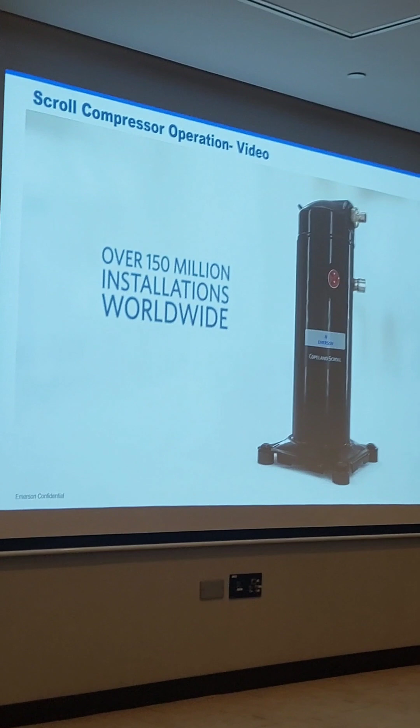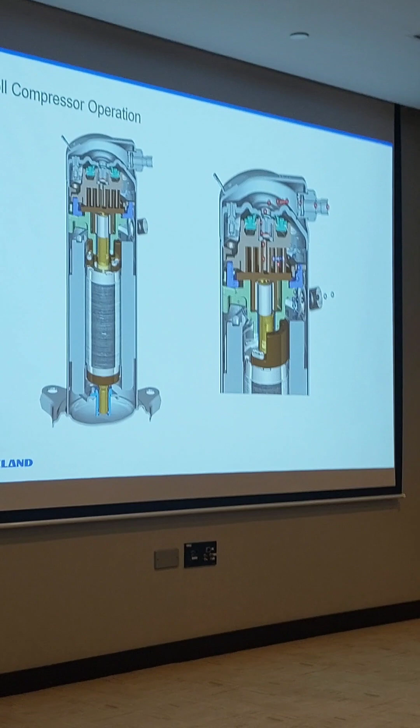So you could see in this particular graphic the refrigerant. Okay, I'll just show this one. The refrigerant enters here, gets into this pocket first, moves from one pocket to another pocket until it reaches high pressure. From here, the discharge takes place. So in the scroll compressor, the top shell is the discharge shell, so it will always be hot, unlike a reciprocating compressor. Because it works on a high precision operation.

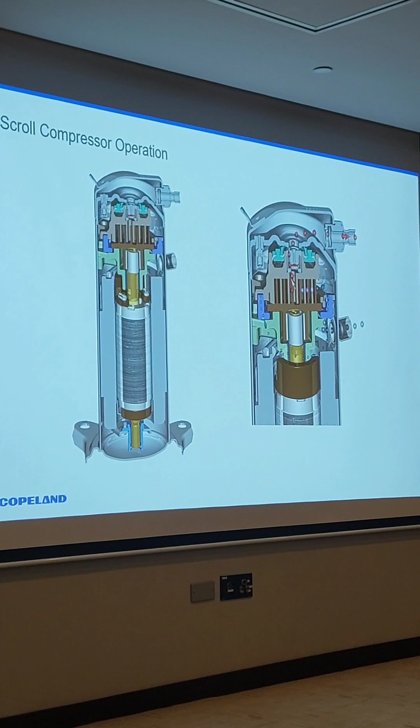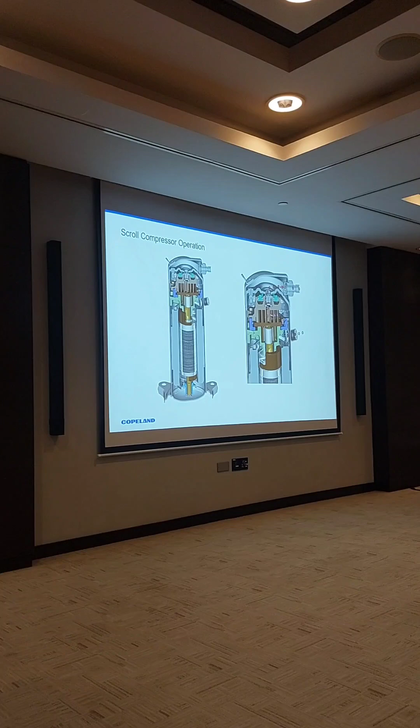Is there any pressure relief valve or something? Yeah, actually, we have a pressure relief valve up to 5 HP capacity. The pressure relief valve is used only when you don't use an HP cutout. In smaller systems like 2 HP, 2-ton systems, people may not use an HP cutout, so we use a pressure relief valve inside the scroll. So up to 5 HP you get the pressure relief valve.

Beyond that, it is compulsory for you to use an HP cutout. Generally, everyone uses the HP cutout when it comes to bigger capacity. With smaller capacity, people take a chance, where we have the IPRV, internal pressure relief valve. Okay, that's how it takes place. The top shell will always be at discharge temperature.

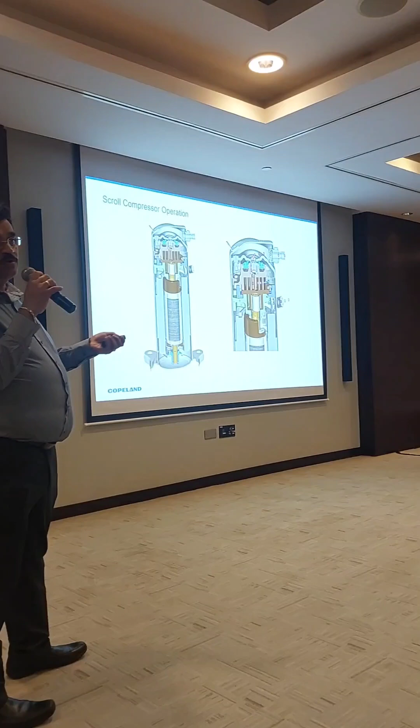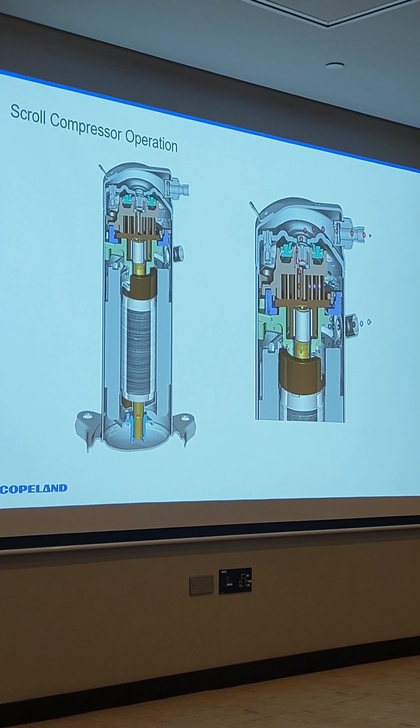While handling the scroll compressor, you have to be careful because the top shell can go up to even 100 degrees centigrade or so. So be careful while handling the compressor, especially when it is running, touching these parts. And don't run any wire on the top. If the temperature increases, depending on the quality of wire, the wire can melt. So you have to ensure that there is no sensor or wire passing on the top of this while installing.

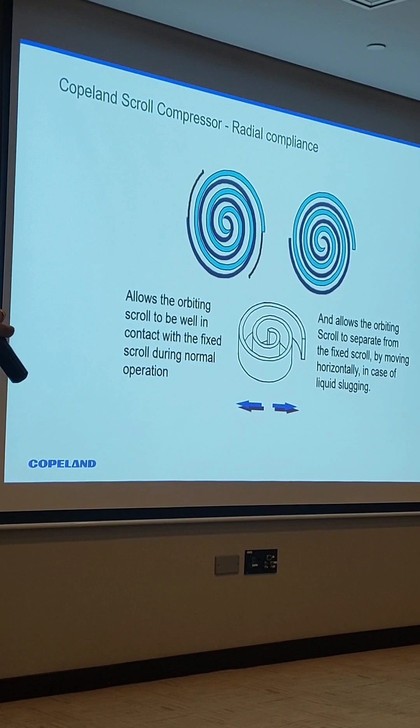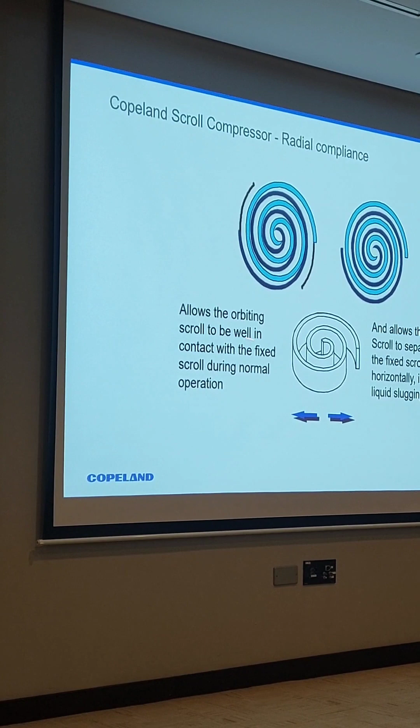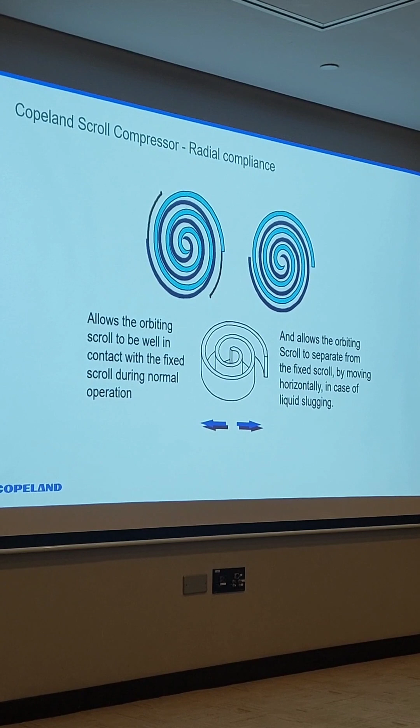So we call our compressor a compressor with dual compliance. It has radial compliance as well as axial compliance. Radial compliance is when the scroll flanks get separated from each other when liquid enters inside. Generally in a reciprocating compressor, when liquid enters the cylinder, you cannot compress liquid. We can compress only vapor.

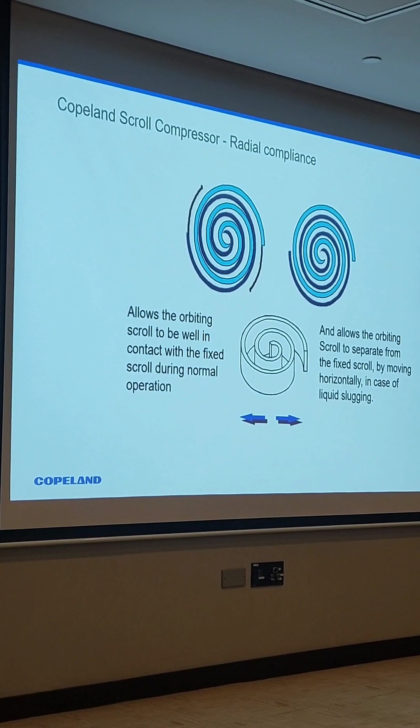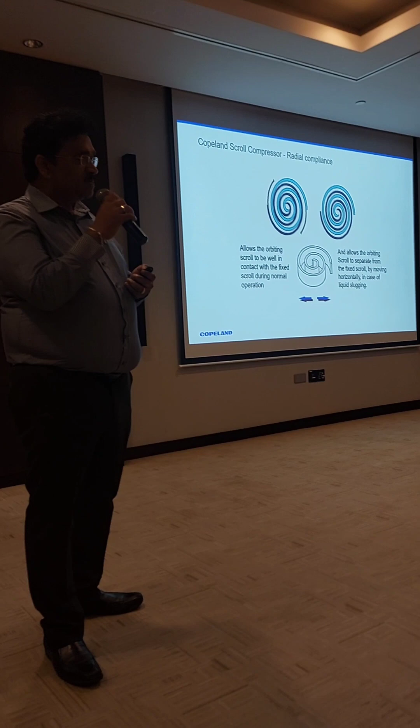If you try to compress a liquid, it will break your reeds, it may break your valve plate, it may break your gaskets. We call it blown gaskets. It breaks because it tries to find the least path of resistance to go out. Even small liquid handling will be very difficult for a reciprocating compressor, but the scroll can handle liquid much better.

Because of radial compliance. As in the earlier video, there is contact made between the fixed scroll flank and the orbiting scroll flank, sideways as well. That contact is made because of centrifugal force when running at 2900 RPM. When the contact is made, there is no bypassing of gas from one pocket to another. The gas moves from low pressure to high pressure towards the center, with no bypass of refrigerant.

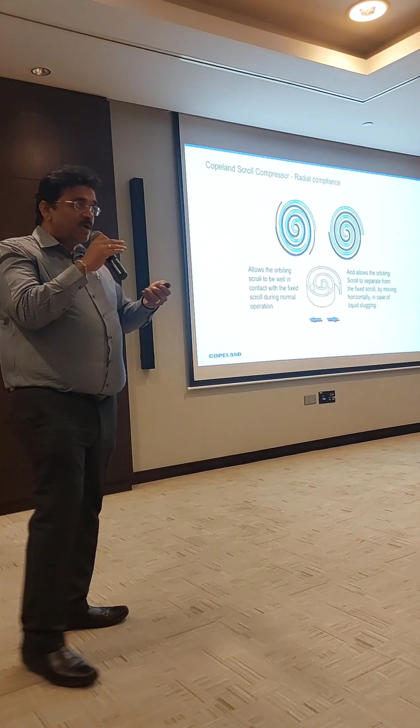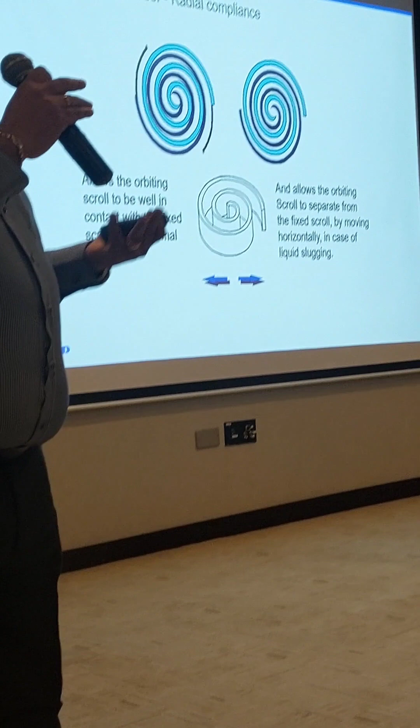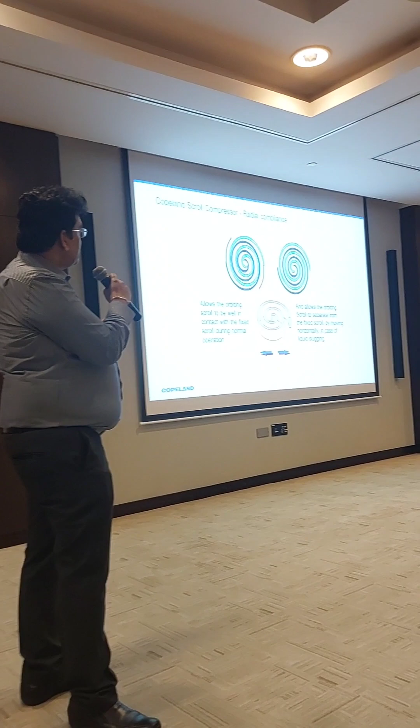When liquid enters the scroll flank by mistake, it becomes hydraulic pressure, which is much higher than the centrifugal force we are talking about. So the scroll flanks get separated and allow the liquid to pass through and get out from the center of the scroll. But it doesn't mean you can put in any liquid. It is definitely better than reciprocating and rotary. Rotary cannot handle liquid, reciprocating cannot handle much, but this handles liquid much better. That is one more advantage of the scroll compressor.

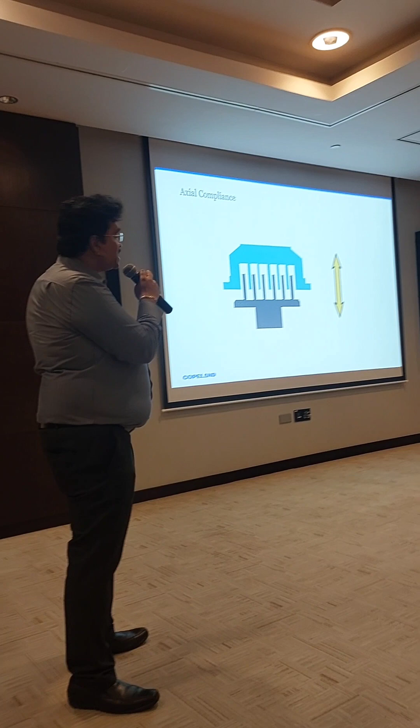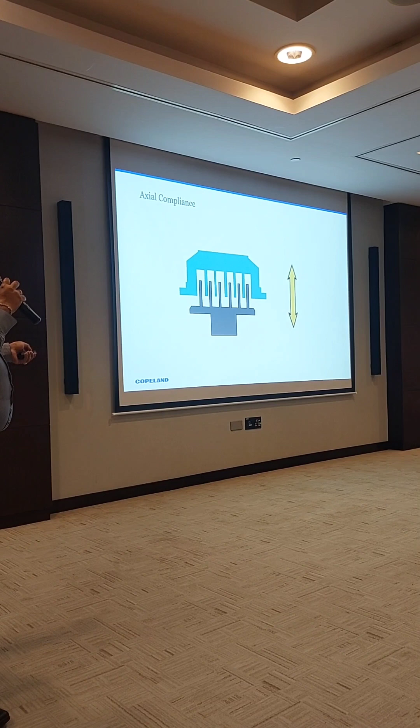And we have axial compliance. When the scroll is running normally, these points need to touch each other, and this tip is supposed to touch here and this tip here. Only then the bypass won't happen. The pockets are properly formed and compression takes place.

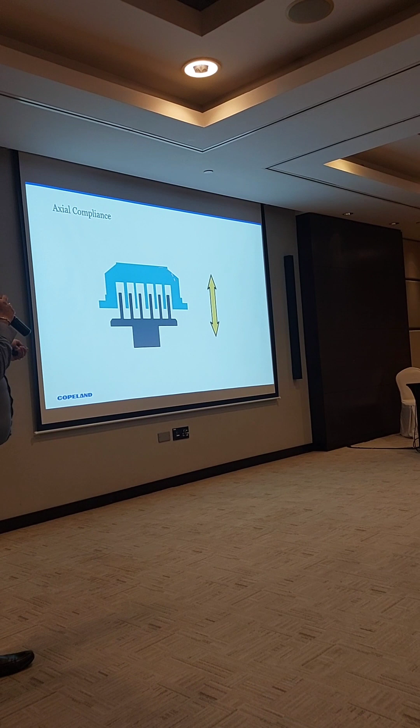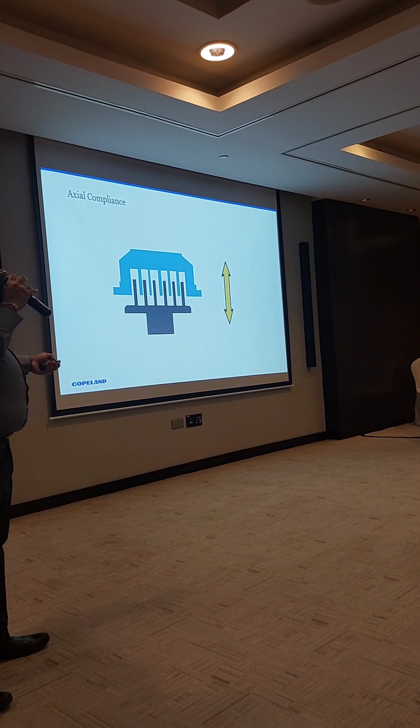When liquid enters here, the very high hydraulic pressure pushes the fixed scroll up. Even though we call it a fixed scroll, it can go up and down by 1 mm. When it is pushed up, it bypasses here and the liquid just goes out. So both ways we avoid liquid getting compressed, and it just gets out of the scroll compressor.

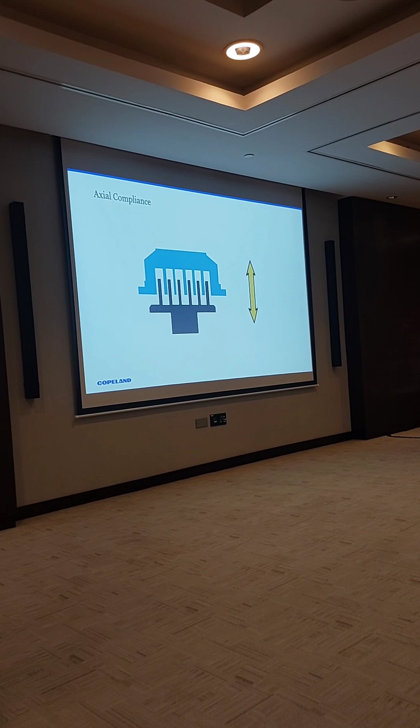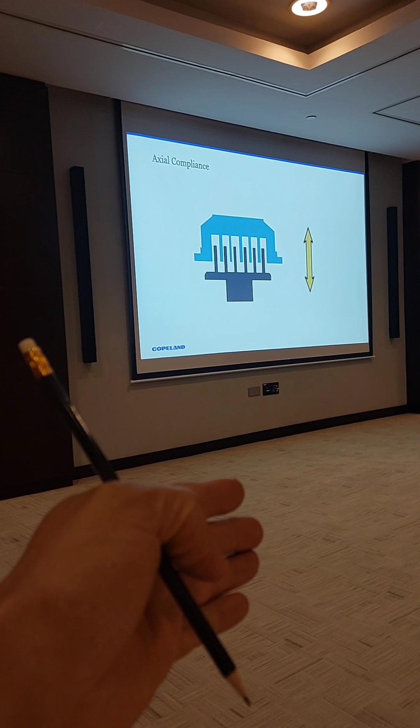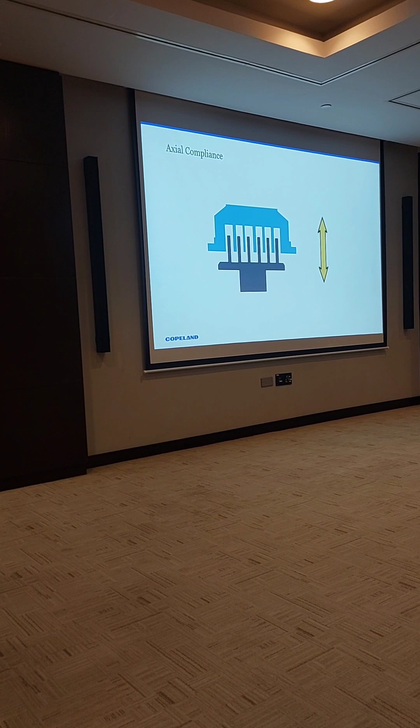Okay, but some refrigerants are recommended to be charged as liquid, like R407 or R410. During charging, with the unit off, we give some liquid, then during start we need more gas. In this case, how do we charge the liquid? Yeah, it's a good question. Whenever you use a scroll compressor, not only ours, any manufacturer's, when you're charging the system, at least 70% of the charge will be in liquid form in the receiver or high side.

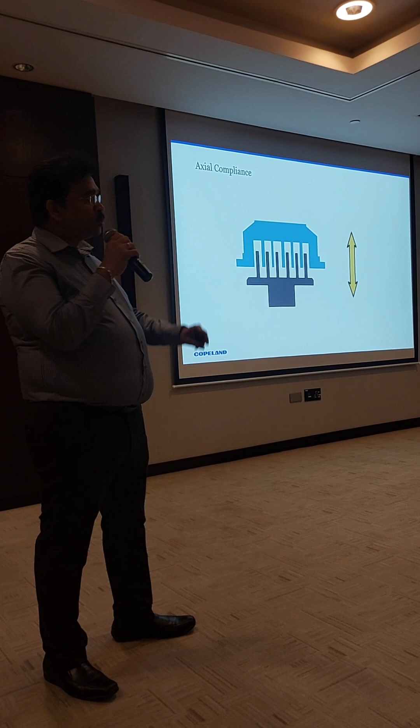You may not have a receiver in all these systems. On the high side, on the liquid line, you charge like 70% of the refrigerant before starting the compressor. So it should be only on the liquid side, not on the suction side. After starting, you can have a controlled liquid charge into the suction. Controlled liquid charge is like you have a manifold: open, close, you can charge. That way you are not allowing the liquid to directly get into the scroll.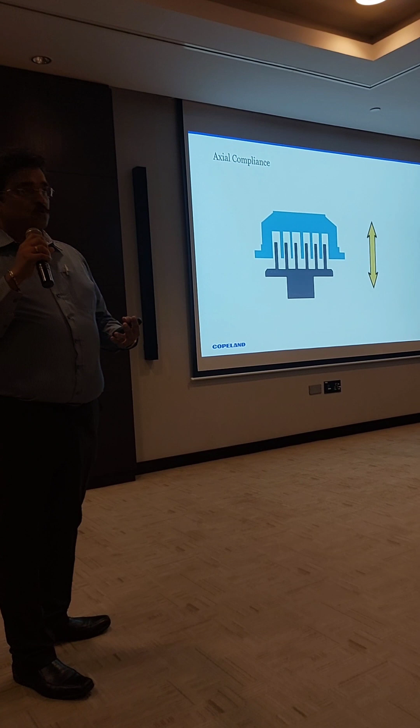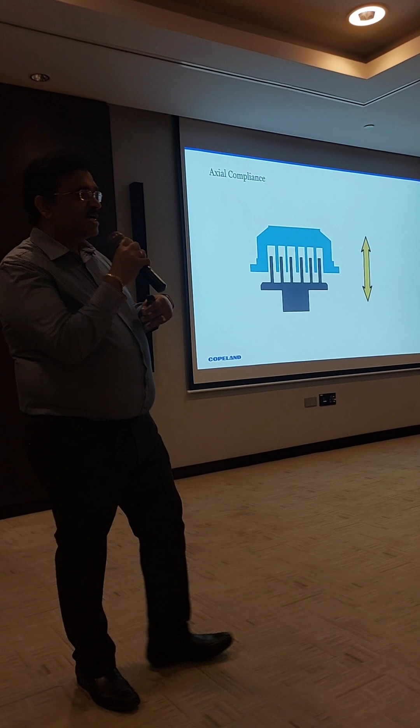So you need to ensure that when it is running. Yeah, you need to ensure. That is very important because 410A, again, it is zeotropic. Whatever refrigerant starts with 4, it has a temperature glide. It has to be charged as liquid only. And with scroll, any refrigerant, even R22, you have to charge 70% as a liquid before you are charging the remaining refrigerant in the suction.

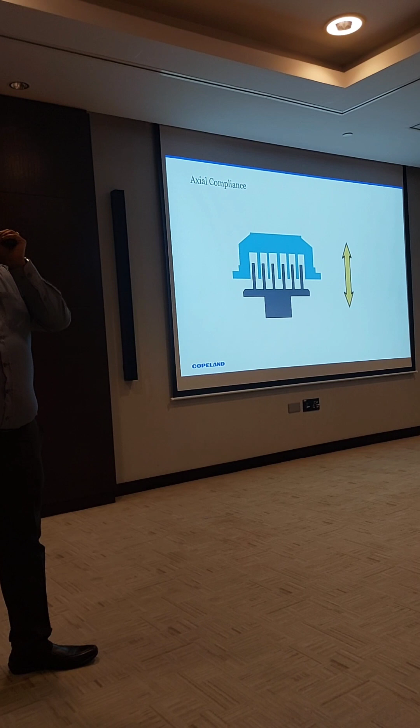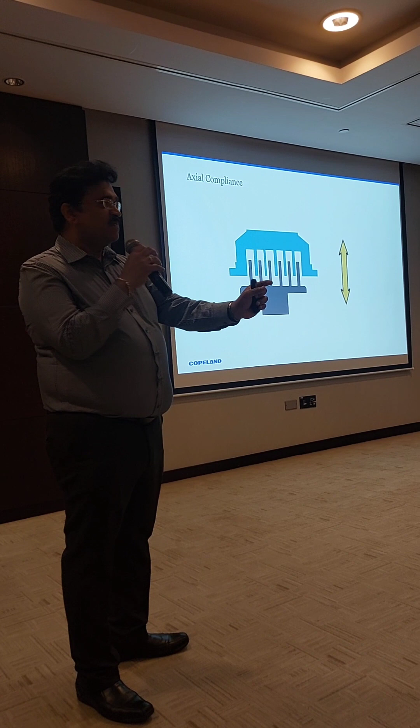Okay. So approximately, before charging you should know how much refrigerant this system will take. If it is a package unit, the OEM manufacturer will specify the quantity, right? Then you know. If it is 10 kg, you put 7 kg in the liquid line, then the remaining 3 kg after starting, slowly charge in the suction line. If we put the 10 kg, what will happen? Are we able to put 10 kg all together?

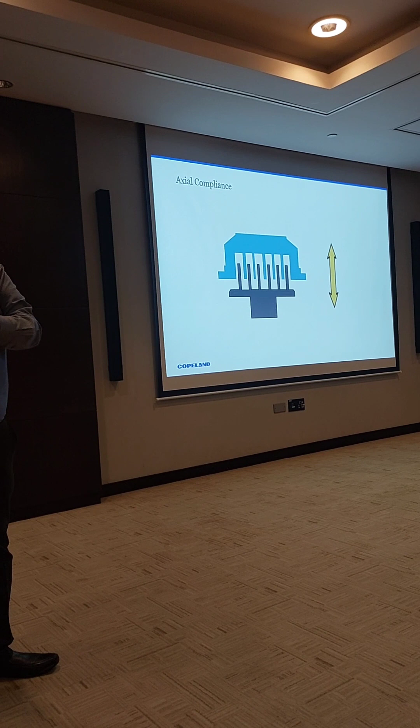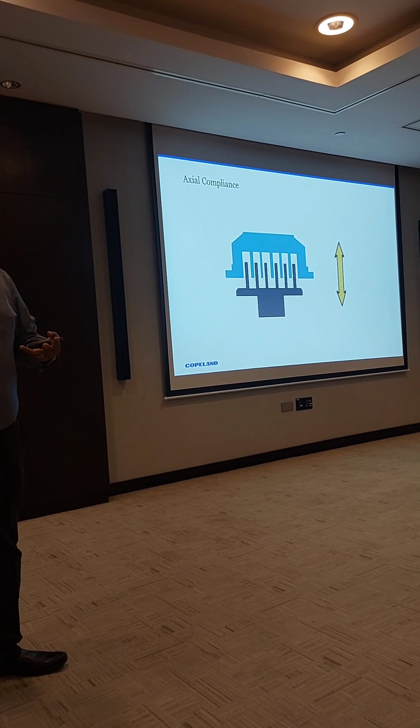You can put it, but generally when you are trying to do it, you may overcharge it also. It is done in the factory. When it's an OEM manufactured package unit, they put all the 10 kg in the liquid line. Okay. But in the field, people may not be carrying a weighing gauge and all that. You may not know the exact quantity. Yes. So approximately, put 70% on the liquid line, then the remaining you slowly charge in the suction line and get that pressure, right?

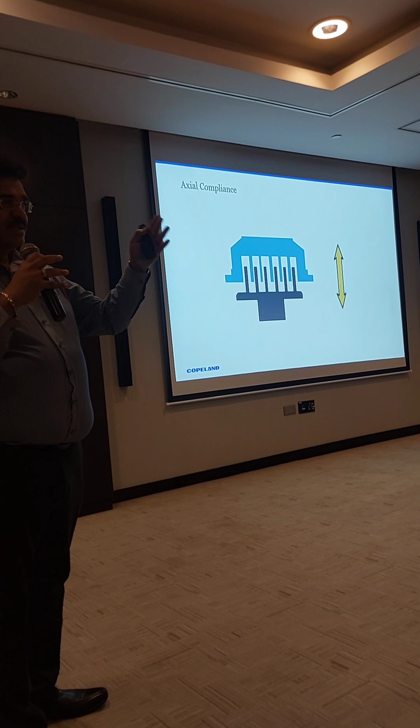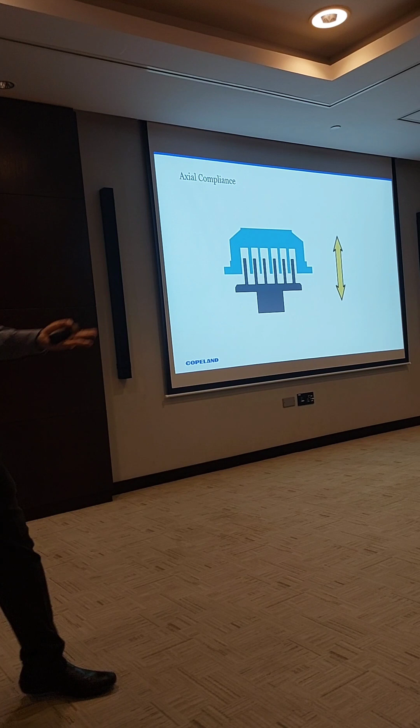Yeah. I'm not seeing many people carrying a weighing gauge to the site. You only see suction pressure, see whether return is coming, and you try to charge. Maybe if you have a sight glass, you look at the sight glass, right? So when you're doing it approximately, put about 70% on the liquid side, and the remaining you slowly charge on the suction side, controlled: just open the manifold, close it, open, close. With 30%, charging will be easier rather than trying to charge 100% in the suction.

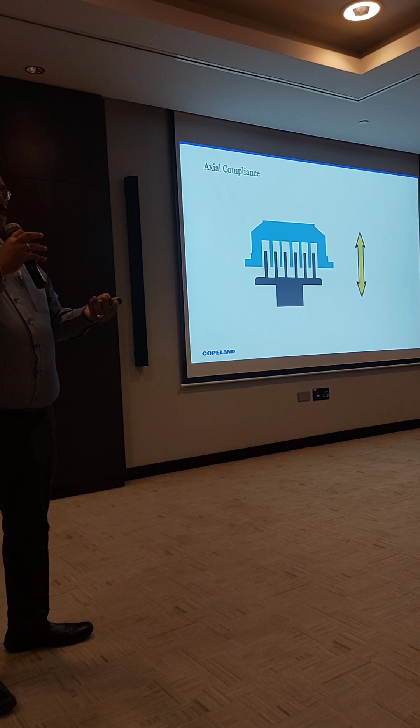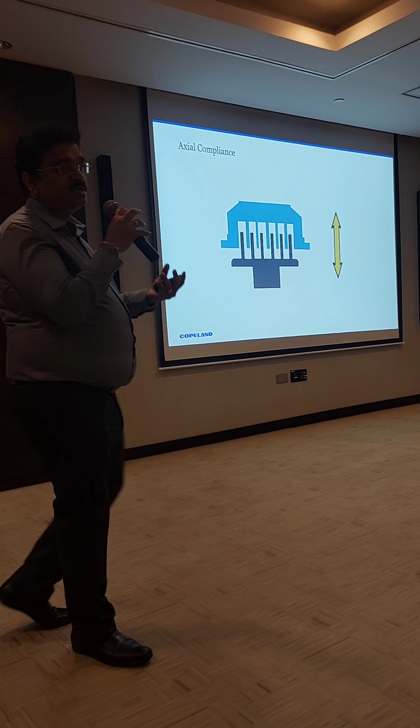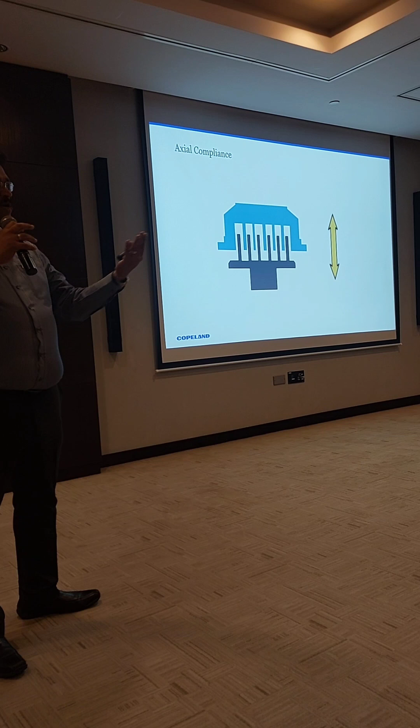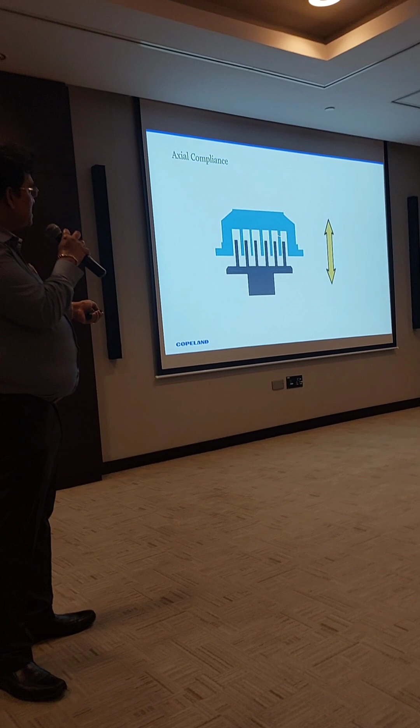That is one. The other thing is, these scroll flanks are lubricated by the oil mist carried by the refrigerant. Whenever you have a leakage, you find oil coming out, right? Yes. So oil is always in circulation in the system. We say at least 1 to 1.5% oil will always be circulating in the system. That oil in mist form is coming back. Inside the compressor, there is no separate lubrication for these areas. This lubrication is taken care of only by the refrigerant. When the refrigerant goes back carrying the oil, that refrigerant with the oil mist lubricates these parts.

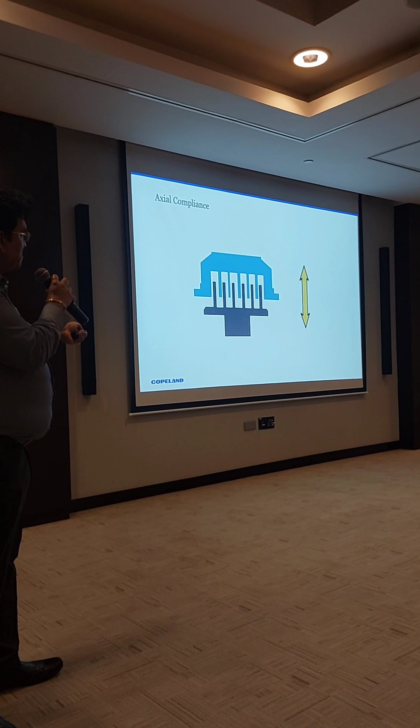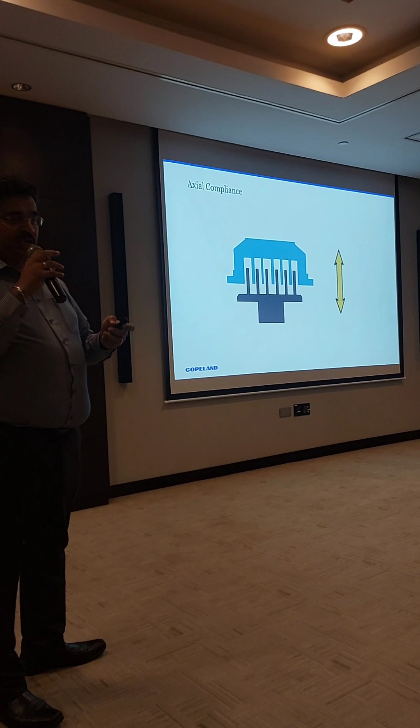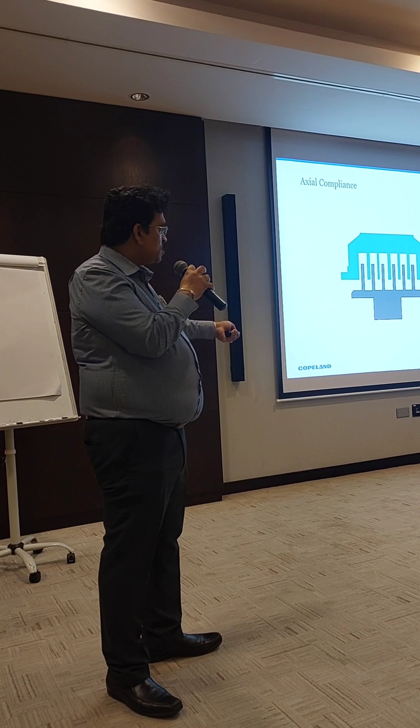So when you start the compressor without enough refrigerant, say I want 10 kg but I just charged 1 kg and started the compressor, there won't be enough oil coming to this portion, and it gets overheated. You have a bearing here, the orbiting scroll bearing. When this gets overheated, the orbiting scroll bearing gets overheated, and the oil won't stay. Oil has some viscosity, and the viscosity reduces with temperature. When the temperature increases, oil viscosity comes down.

So when the temperature increases here, this temperature will be passed on to here. Because of the high temperature, the oil viscosity comes down. It cannot stay there; it will fall off. Then there won't be any lubrication here, and this bearing also fails. So to take care of that, for any scroll compressor, when you are charging, put at least 70% in the liquid side before starting the compressor, and you can charge slowly after that.

Don't just equalize the pressure, putting the refrigerant in vapor form until cylinder and system are equalized, then start the compressor and charge. It may work for some time, but these compressors are supposed to work for 15-20 years. If you are not following this, they may fail in 6 months or 1 year. That is not expected of this compressor. So you need to follow the proper charging process. It's very, very critical actually.

For the scroll compressor, whether refrigeration or air conditioning application, you need to charge 70% before starting the compressor. You should not bypass the LP cutout. You always do, right? With semi-hermetic compressors and all that, we bypass it, and after getting the pressure, you just do it. We are not supposed to do this. That is one more checkpoint. Don't bypass it, so that you charge enough and have enough pressure before starting the compressor. That will take care of this lubrication.